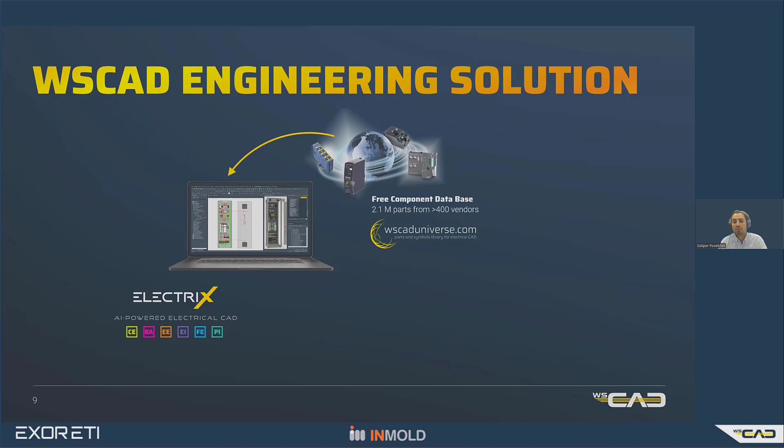The engineering solution is built around 3 main components. The first component is Electrix AI, the main engineering platform and the latest generation of the ECAD software. This is where all design work is created. The second component is WSCAD Universe, the engineering data platform and one of the largest parts databases on the market. It includes more than 2.1 million components from over 400 manufacturers, all available for direct download into the project.

And the third component is the set of WSCAD mobile apps, including the augmented reality app used for maintenance, service, and on-site work, giving engineers access to all documentation directly in the field.

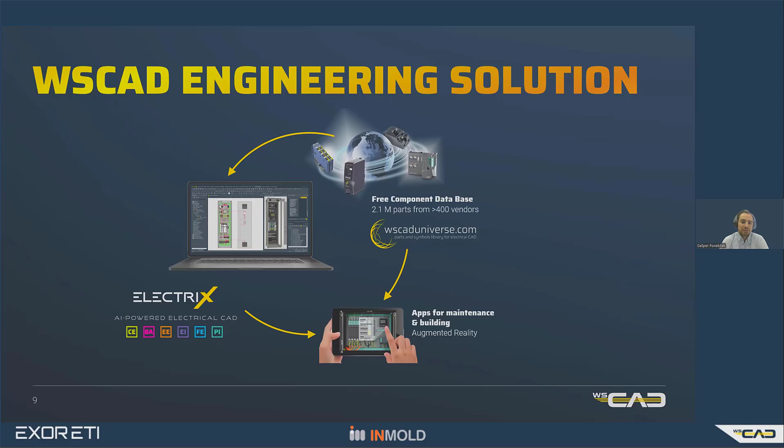This platform is modular and scalable, meaning it can be adapted to different engineering areas and project sizes. It includes everything needed for planning, designing, and documenting electrical machines, production lines, and building automation systems. All engineering disciplines are connected through automatic cross-references. So any change in one part of the project is instantly reflected across the entire design, in schematics, cabinet layouts, fluids, installation plans, etc. This ensures consistency, reduces errors, and keeps the entire project synchronized.

Now, let's move one step deeper and see how the engineering process actually works when automation is involved, and why Electrix AI is setting new trends in electrical design.

Now, let's look at how the engineering process works with Electrix AI. The idea is simple. Instead of creating everything manually, different data sources can feed information directly into the software. On the left, you see the typical inputs: configurators, CAD PDF files, ERP data, and components from WSCAD Universe. All of this is imported or connected through APIs and automation interfaces.

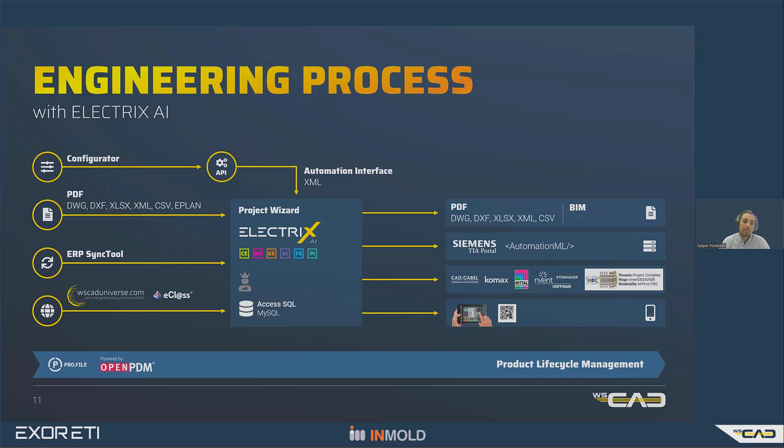Electrix AI connects directly to automation platforms like TIA Portal, WAGO, and Phoenix Contact. And through OpenPDM, also the major PLM and ERP systems such as SAP, Teamcenter, and Windchill. This ensures smooth data exchange across the entire engineering process.

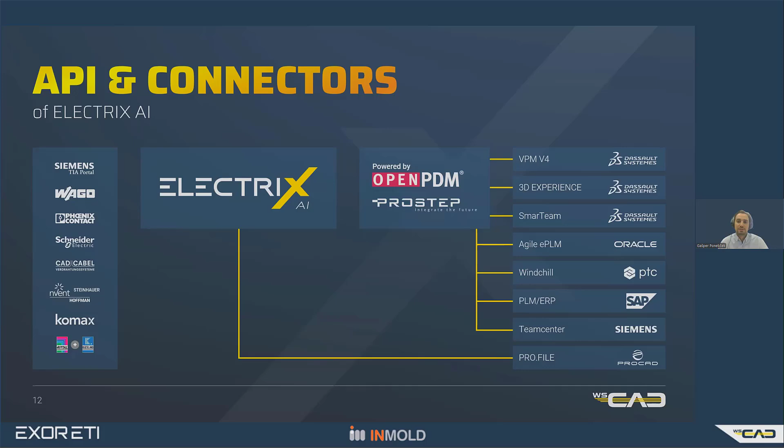Electrix AI makes electrical design faster, easier, and more consistent. First, speed. AI takes over repetitive tasks. Schematics can be created much faster with a few clicks. Second, automatic documentation. BOMs and reports are generated with one command, saving time and preventing manual entry mistakes.

Third, fewer errors. AI checks the project and immediately alerts you to missing connections or inconsistency before they become problems. And finally, ease of use. The AI Copilot guides users with templates and smart suggestions, helping even less experienced designers to work confidently. In short, AI accelerates your work, keeps your documentation clean, and reduces the manual effort in every project.

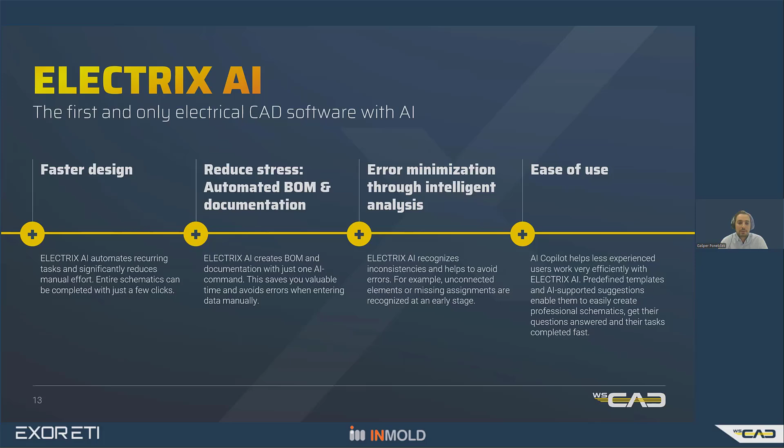And with that, we've reached the main part of today's workshop, the demonstration of the project wizard. I'm very happy to introduce our guest speaker, Jordan Vitezovic from Inmold. Jordan is an electrical design engineer, and today he will show how Inmold uses the project wizard in real engineering projects, from creating and defining macros to generating complete documentation automatically.

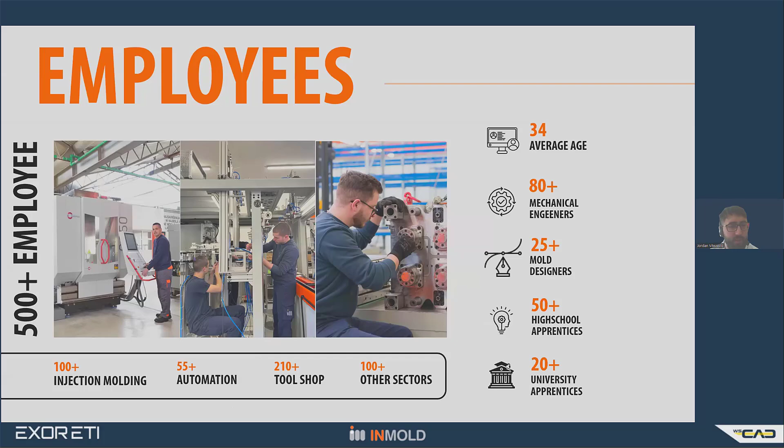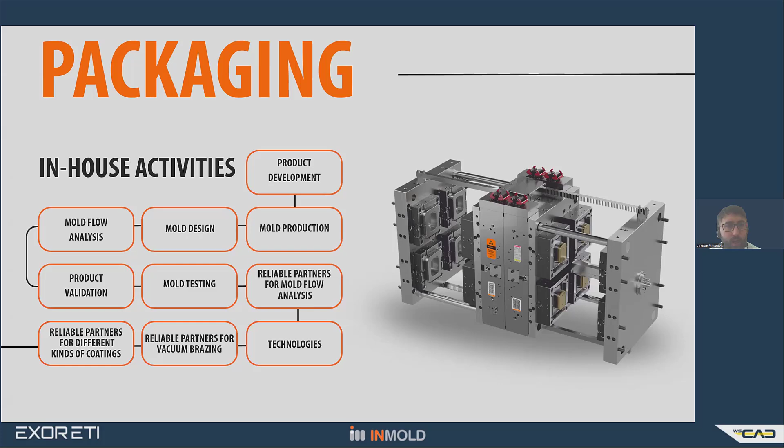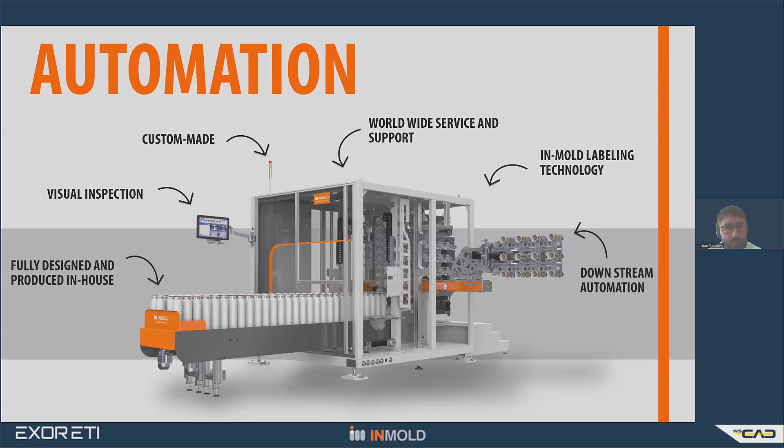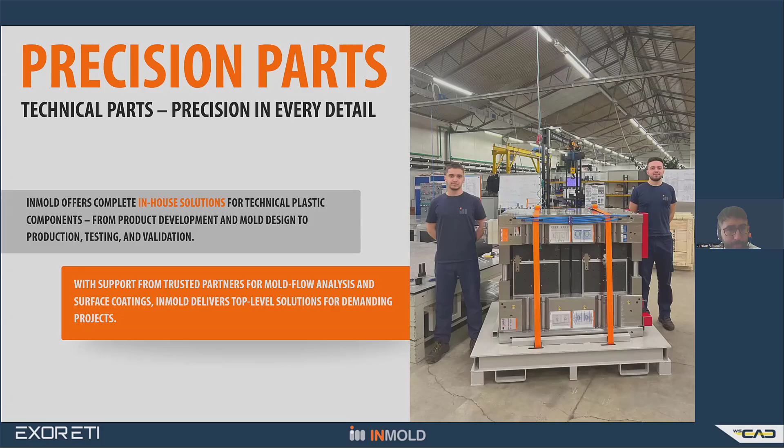Automation department. I'm part of this department. Almost everything is in-house made. We produce IML robots for all IML solutions, and there we use WSCAD daily for all electrical designs. Okay. Inmold offers precision parts, complete in-house solution. Injection molding. We are IATF certified.

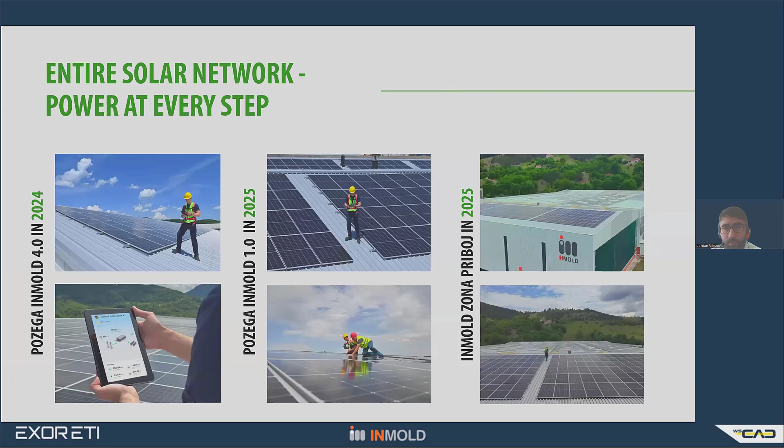Okay, in the next slide, you can see our entire solar network in Serbia. Our references talk about us. There are our partners, very well known companies.

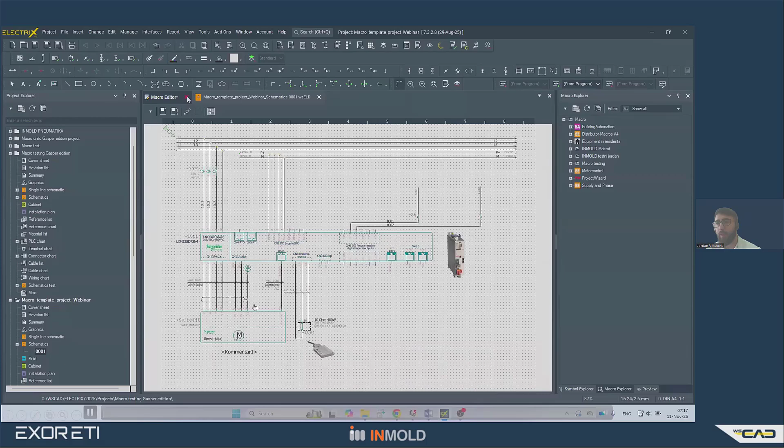Okay, first of all, I want to start with one main question. What does Project Wizard provide us and why do we use it? Project Wizard helps us to standardize our projects and automate them, and saves a lot of time. Now I want to open two types of project. Just a second. Okay.

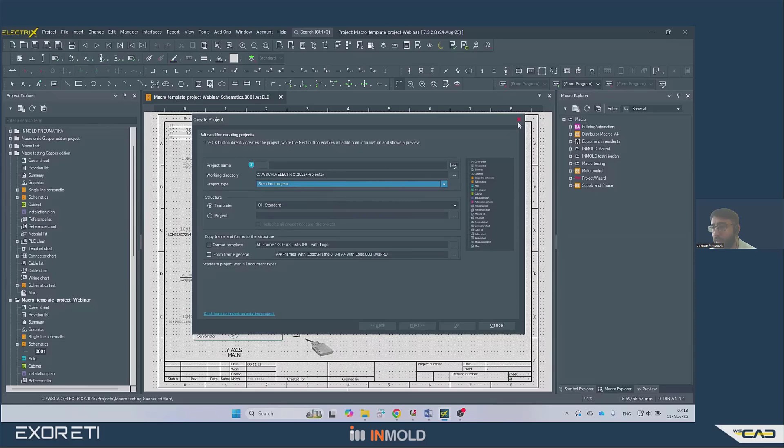I want to open the macro template project. I use the macro template project for making macros and configuring my macros, and then I call them in the standard project using Project Wizard. I already made those projects. Okay, there is a simple symbol of a servo drive. There is a motor and braking resistor.

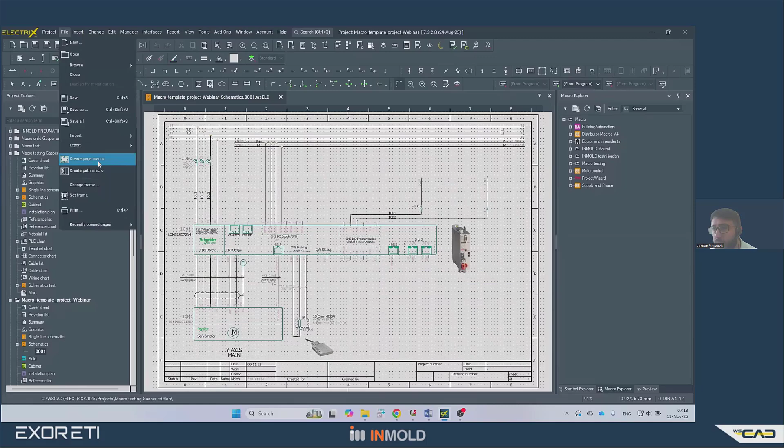Now you can make a page macro, that is a full page macro, and a part macro, that is part of some page. Okay. Just a second. You can add variables using these brackets. There are a lot of variables and you need to play with them to find what is good for you. Okay. You'll figure it out when I call them in the Project Wizard.

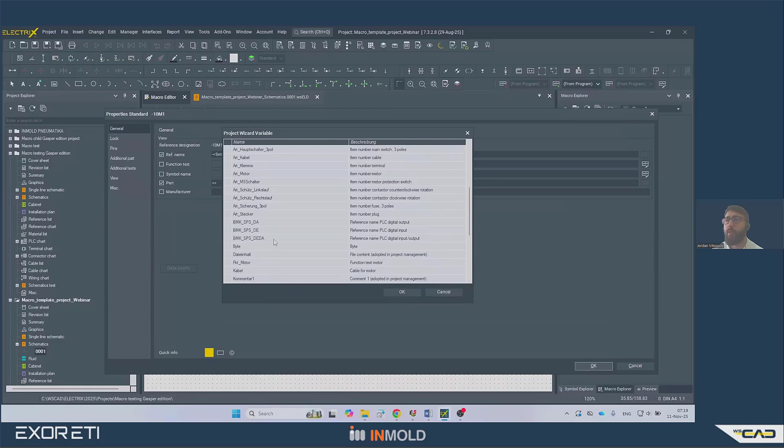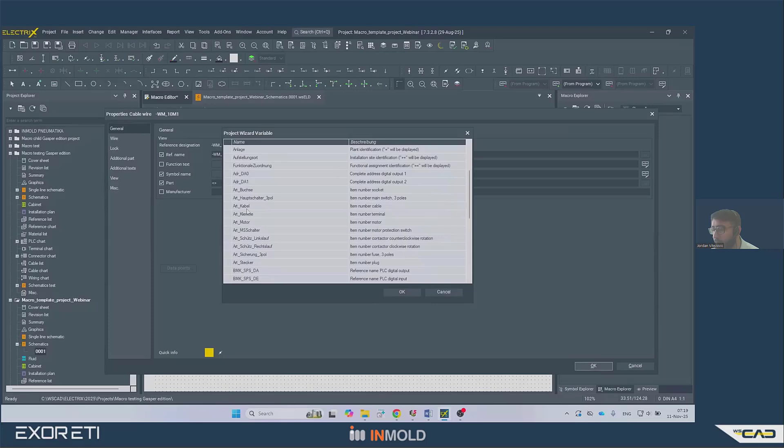Now I want to add a part for the motor. Sorry. Okay. There is the item name for the motor. Then I want to add some function text. Okay. I want to change the cable. There are variables for the cables, for the terminals, and all other disciplines. Okay.

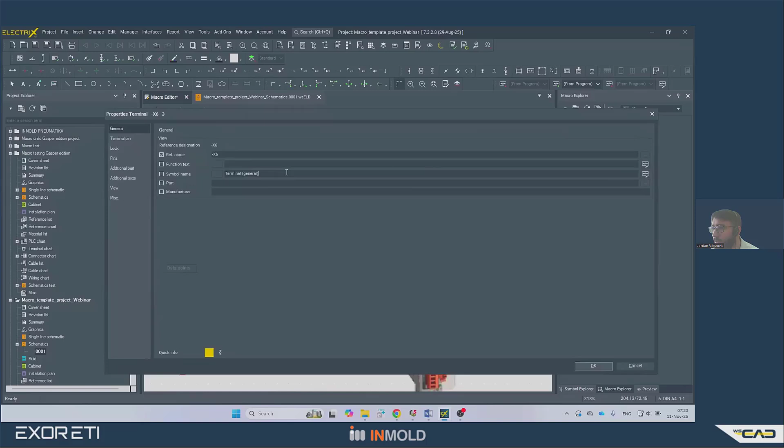I don't want to waste time. I want to add some numbers for the terminals. Just a second. Okay. I want them to be consecutive. We need to standardize our project because when we standardize our project, we don't make any mistakes. Because if we have some similar drives, we can just call them in the project. Okay.

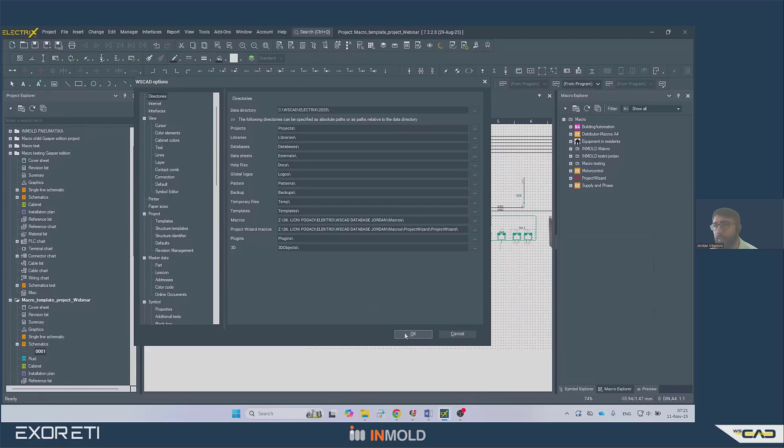Now I want to show one thing. We are going to settings. The Project Wizard macros need to be a subfolder of the macros. If you don't do it well, you won't see your macros. It's very important to configure those settings. Okay, then you must save your macros into the Project Wizard folder. Okay, I already made macros for this webinar, but I want to show you. Okay, and you need to save in one of these folders.

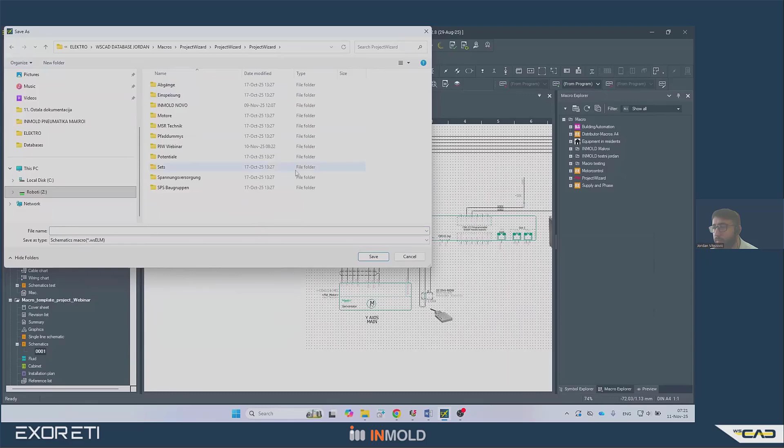Okay, I will close this macro template project. Okay, we need to go to the standard project. There I will call my macros. Okay, there is Project Wizard. You can see there are several groups. I will delete and start. Every group is a specified part of the project. And you can make a lot of groups.

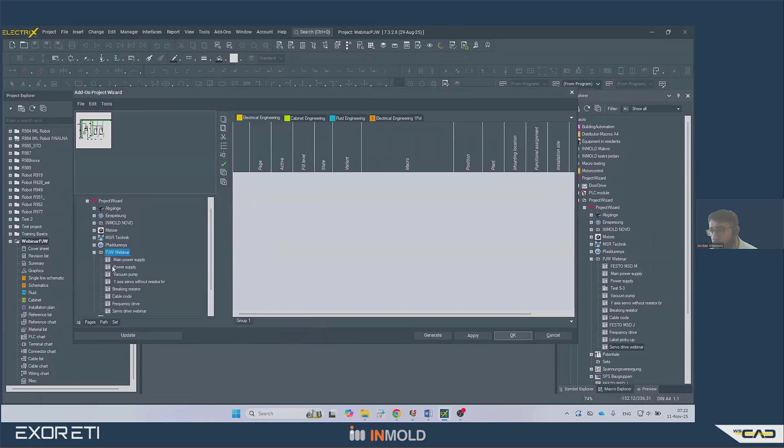Okay, I will call my servo drive for the webinar. Okay, you see the state is incomplete. Now you need to enter your values. Okay, I will put some text. It doesn't matter that it's not grammatically correct, but okay, you get the point. Okay. Now you can open your database and add some cable. I chose some Unitronic. Okay. Now you can insert the function text.

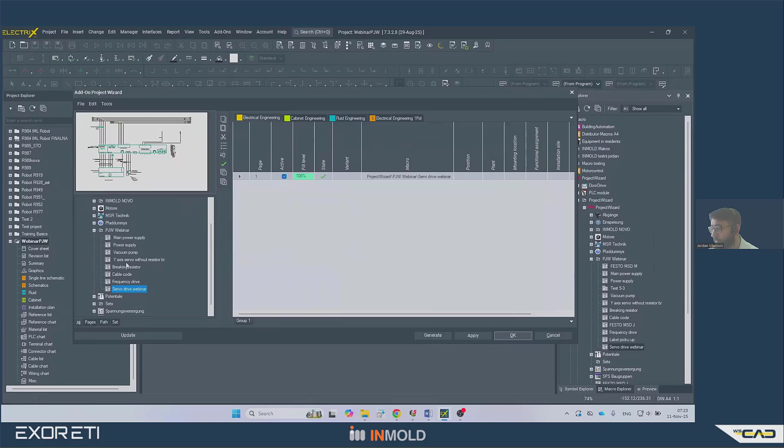Now you can choose the part for the motor. That will save a lot of time compared to manual work, and when you standardize your equipment you can do it easily. Okay, now I want to add some power supply, some main power supply, and I will add something else. There is a vacuum pump. This page can be 100, 200, 300. You can easily change your pages.

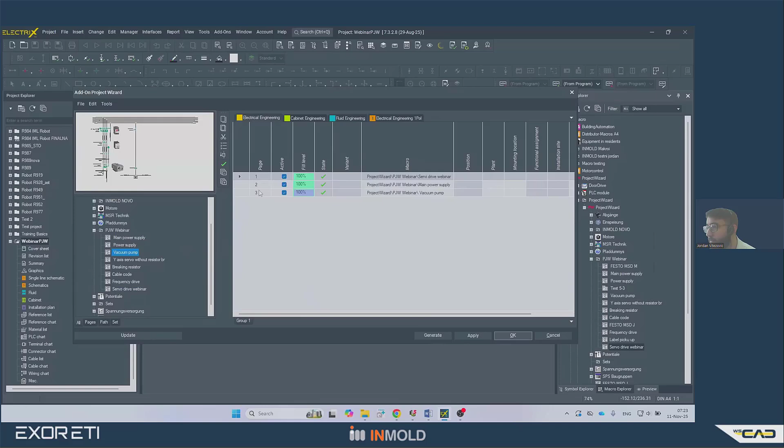Okay, then you need to generate your project. There are multiple disciplines where you can use your project wizard. There are our comments, variables. If you made some mistake, you can easily edit your macro directly from the project wizard. Making macros will consume some time, but when you make it correctly, it will be perfect.

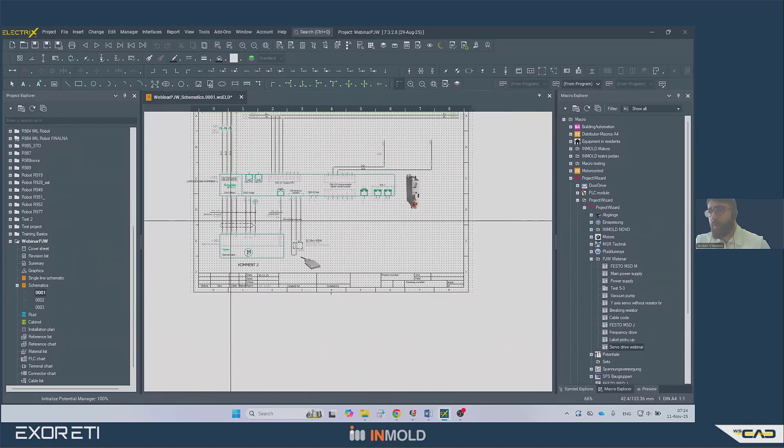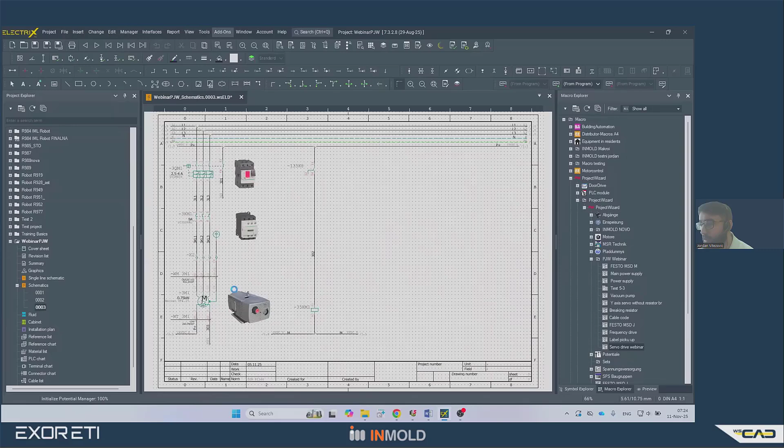Now I will go to page 2. Okay, page 3. Every mark should be correct, but if you made mistakes, you can easily change them from this project wizard folder. Now I will enter a new group.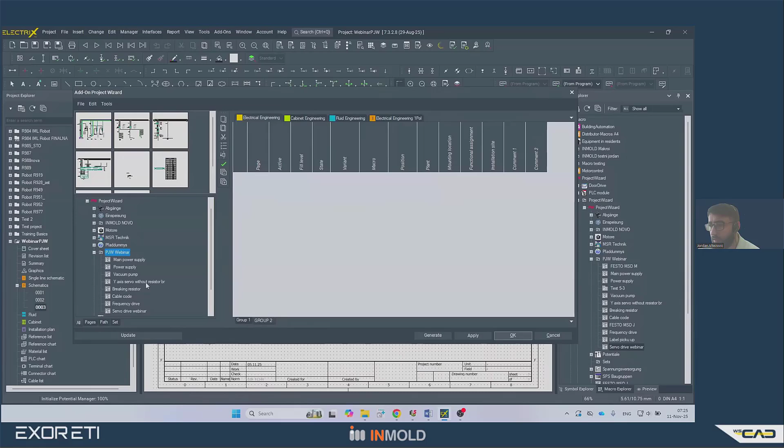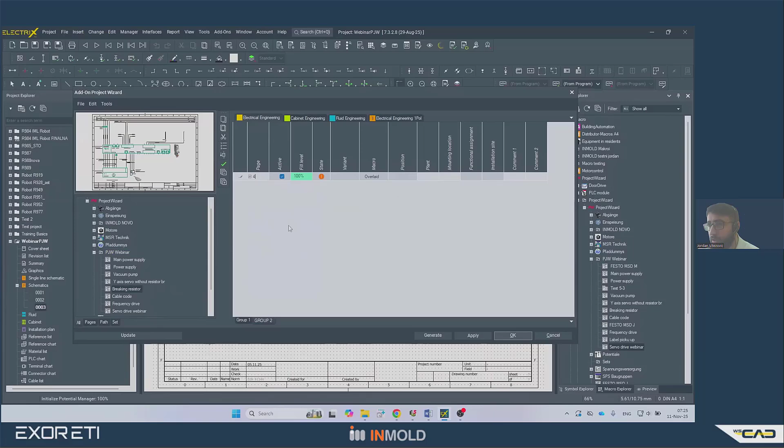Okay, I want to add a servo drive without braking resistor. There it is. You can see there is no braking resistor, but I want to overlay my macros. You will see. Now you will see they are easily connected. Now I need to generate my groups, but be careful when you generate these two groups, they will overwrite, and you need to be careful with that.

Okay, there is 4. You can see there is a braking resistor. You can make variants of your macros and everything you need. You can make sets. Gasper already talked about that, and I suggest you watch that webinar.

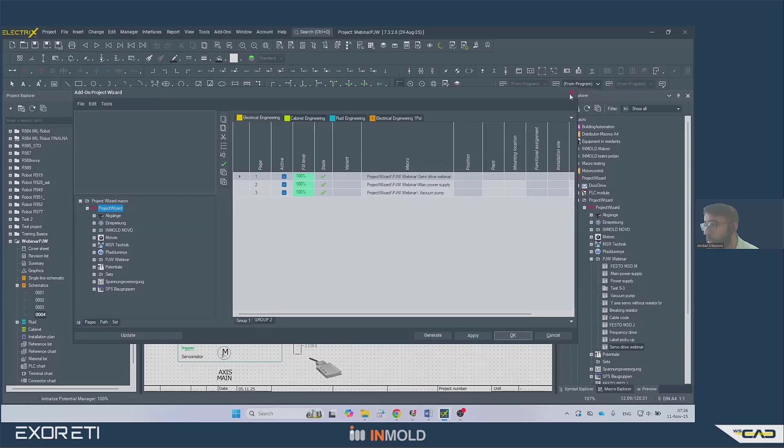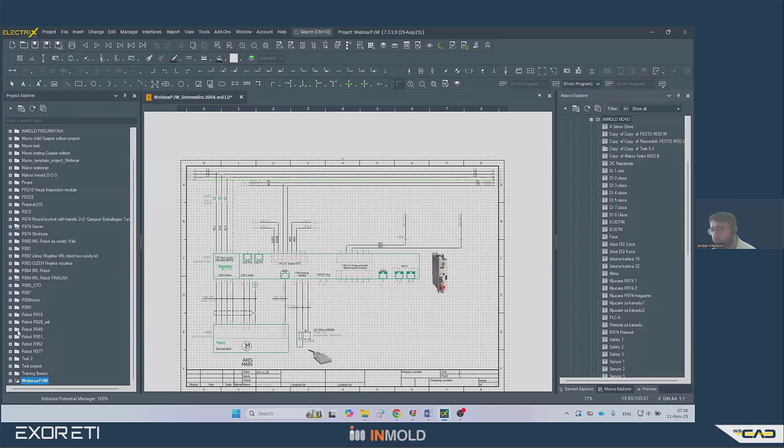Okay. Just a second. There is a base of our macros. We try to make macros for every situation, automate our work and save a lot of time. It takes a lot of time to make macros correctly, but when you make them, they save a lot. I can't reveal confidential information about our projects, but I want to open a real project. You can see there are a lot of groups and each group represents a part of our project.

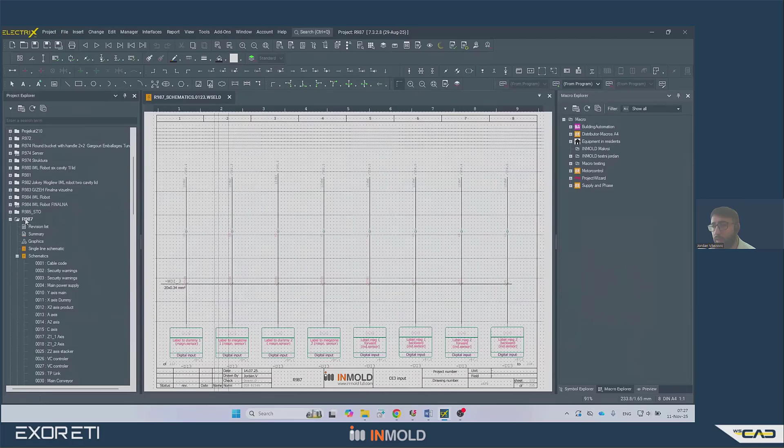Okay. Now, just a second. I want to go back to the project wizard. I want to open my project. I already told you that you can use your project wizard in different disciplines. You can use it in fluid, for example, you can overlay multiple macros to make some block or something like that. And it can save a lot of time. Then you can connect your fluid with electrical engineering.

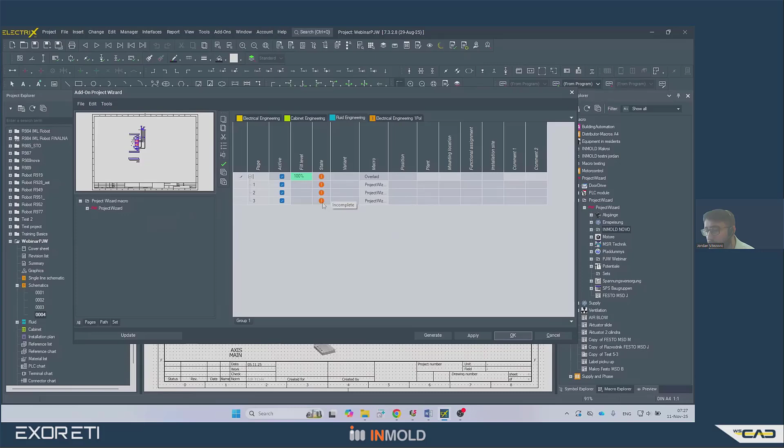If you have some questions for me, and if some of you are using Project Wizard, I would like to see your experience. Before Q&A, I want to show a corporate video of Inmold. That's it. We are waiting for your questions.

Thank you, Jordan, for your great presentation. Thanks a lot, Gasper. It was a pleasure to be a speaker on this useful webinar. Yeah, thank you, thank you. It's really good.

The next section is Q&A. We already got 2 questions. First question: at what level of automation is Inmold currently operating in electrical design, and how much does the project wizard contribute to that process? We try to avoid all manual work. You can see just an example of a servo drive. For example, if we have 5 servo axes, we try to use variants of our macros to save a lot of time on repetitive actions, and we try to make macros for every situation we can, and that saves a lot of time, and we avoid mistakes in our job.

Great. The next question: is it possible to overlay multiple page macros, and is it possible to have multiple variants of a single macro? Yeah, I'll talk about that. Yes, it's possible to overlay multiple page macros. For example, in the fluid engineering I told about, you can make a valve block, but you need to be careful with the positioning of the page macros, and you can make multiple variants of a macro.